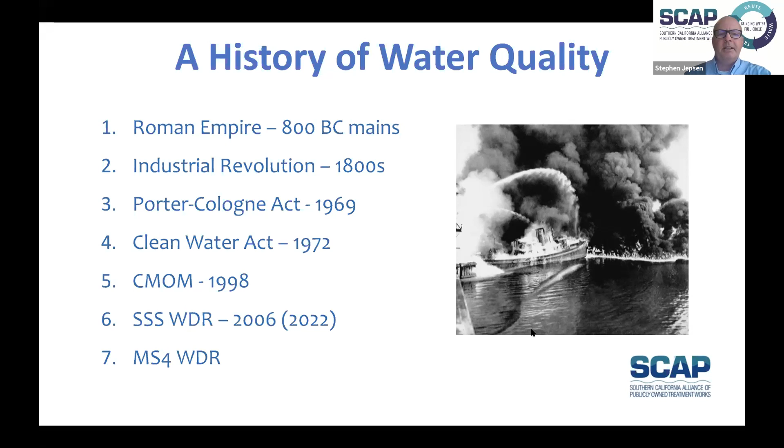Then there's also the stormwater MS4 WDR, focused on cleaning up stormwater. Despite all this progress, we still have water quality issues in our watersheds, so we're not done yet. The benefits of stormwater diversions are that they can help with the challenges we have with water quality in the watershed. Next slide, please.

So the original purpose of POTWs is to treat pee and poo, really designed to transport and treat pee and poo, not metals or pesticides or industrial chemicals. The POTWs treat, disinfect, and discharge the treated water to the ocean or to streams. In some cases, stream discharge is required to maintain environmental flows through the NPDES permit system.

When there's a demand and it makes economic sense for public ratepayers, POTWs do additional treatment to make recycled water for irrigation, agriculture, and manufacturing, and soon we'll have several large-scale potable projects coming online. Next slide, please.

In the process of cleaning human wastewater, we make recycled water, biosolids that are usually used for soil amendments, biogas, mostly methane, which is used to generate on-site heat to improve the treatment process, to generate on-site energy to power the POTW, and used as a low-carbon vehicle fuel, 90% less NOx than diesel. And in a few cases, the biogas is scrubbed and injected into the energy provider's natural gas pipe system.

So what about adding stormwater treatment to the POTW portfolio? Next slide, please.

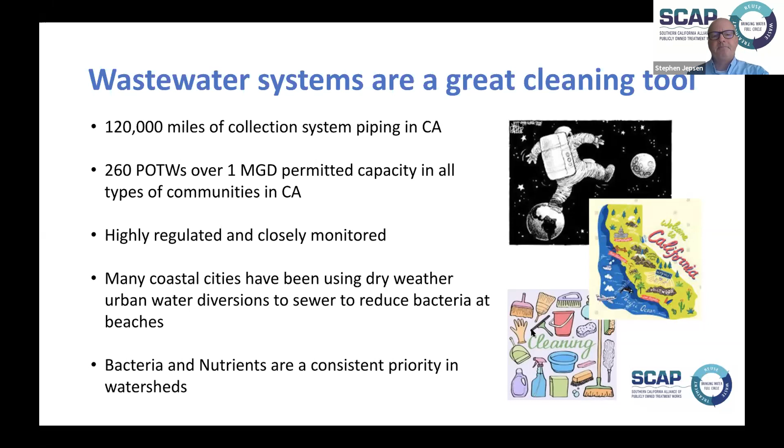So shifting gears for a second, how many workers do we think are at a typical treatment plant? Of course the number varies with the size of the plant, but what do you think the average is? Take a look and put an answer in your head.

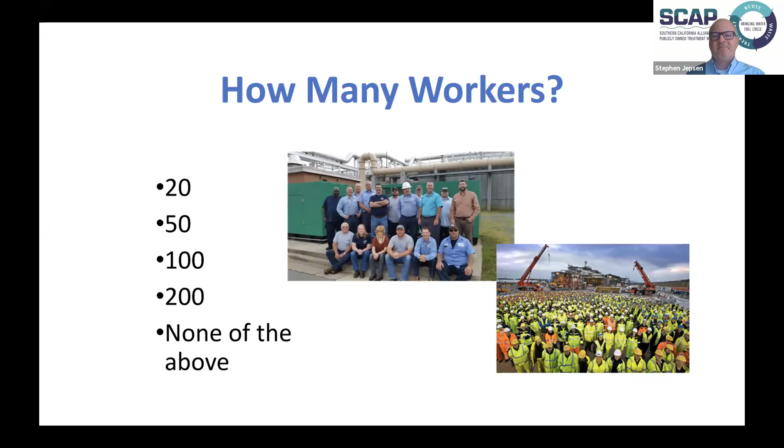If you picked none of the above, you were right. There are billions of tiny microorganisms doing the work of cleaning the water. These workers need a regular food source to thrive. Changing the food source or food ratio, as happens when large amounts of rainwater enter the system, can be a problem. Salts and pesticides, among other constituents, can also be a problem.

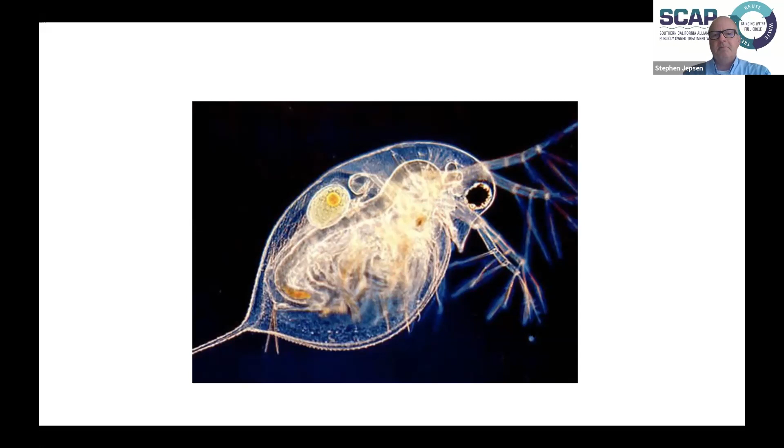So when significant changes in flow or new constituents enter the plant, the workers can die and the plant will be upset. Permit conditions will not be met. Sewer treatment plants have strict discharge requirements that rely on the plant performing at optimum levels. This is why stormwater diversions need to be planned, designed, and managed carefully, as our LACSD team will discuss.

Protecting the treatment plant is one barrier to stormwater diversion, but this can be overcome with source control, pre-treatment, testing, and good design. A previous barrier to stormwater diversions were legal restrictions. Irvine Ranch Water District, Orange County Sanitation District, and LA County Sanitation Districts passed their own specific legislation to implement diversion projects, but this is a heavy lift for smaller agencies.

As Mark mentioned earlier, on September 23rd the governor signed SB 273. This CASA Coastkeeper bill, also supported by CASQA, provides authority for all types of wastewater agencies to accept, treat, and discharge stormwater where it is viable and economically feasible.

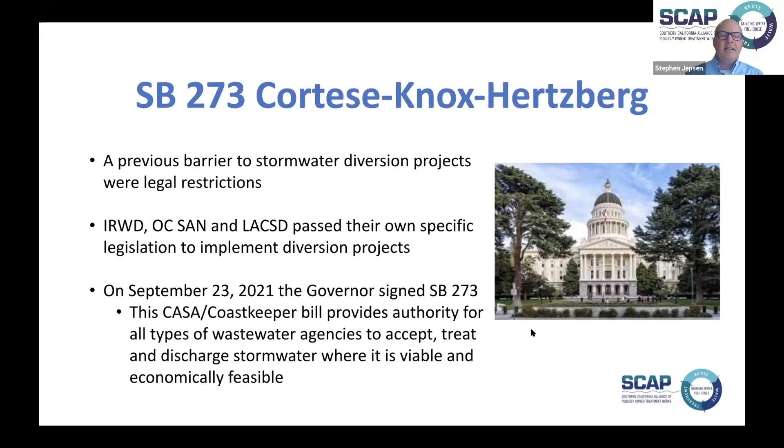So how to get started? Well, first you need to know your audience. There's two differences. Typically, a city or county that has stormwater quality responsibilities is different from a special district or a JPA that does not. Special district type agencies are going to be focused on their wastewater responsibilities. A local satellite or collection system may be part of a regional treatment plant who manages the pretreatment source control program, so there could be two agencies to deal with for a diversion: collection and treatment.

For starters, we should look at the agency's website. Does the wastewater agency have stormwater diversion guidelines or policies? Where is the POTW located in relation to the proposed diversion? What types of effluent does the POTW produce? Are there local limits? What type of constituents will or could the stormwater contain? Will the POTW be able to handle these constituents?

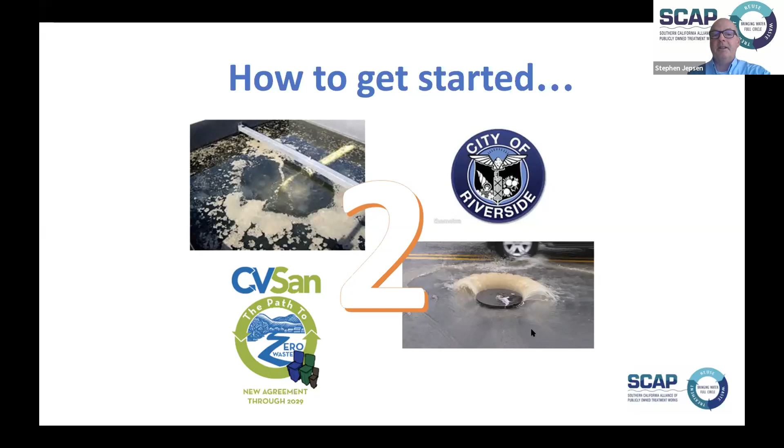Two things that, of course, must not happen: a plant upset or a sewer overflow. Either of these events can affect public health and the environment and bring hefty fines.

So what's next? Many agencies have successfully implemented dry weather diversions for bacteria management in coastal areas. Now agencies are exploring more upstream diversions and controlled wet weather diversions. As part of a recent Southern California Water Coalition webinar, Susan Moisio with Jacobs Engineering talked about smart systems, allowing collection system operators to monitor and remotely regulate diversions real time as system capacity allows.

Richard Loeffler with Xylem has presented to us on how combined systems in the Midwest and East Coast are using artificial intelligence with models and real-time sensors to minimize combined system discharges during storm events, saving ratepayers money with an immediate return on investment. I think next steps will be linking land use types, constituents of concern from those land use types, and sensitivity of receiving water, such as special habitat, recreational uses, and drinking water supply, to prioritize diversion projects.

We'll see hybrid approaches where stormwater capture, diversion, and recycling projects may incorporate dry weather and first flush to the wastewater system, cleaner flows to habitat, and excess clean flow to drinking water supply. If the capture diversion systems can be scaled up and combined to provide flood attenuation, we've hit the jackpot.

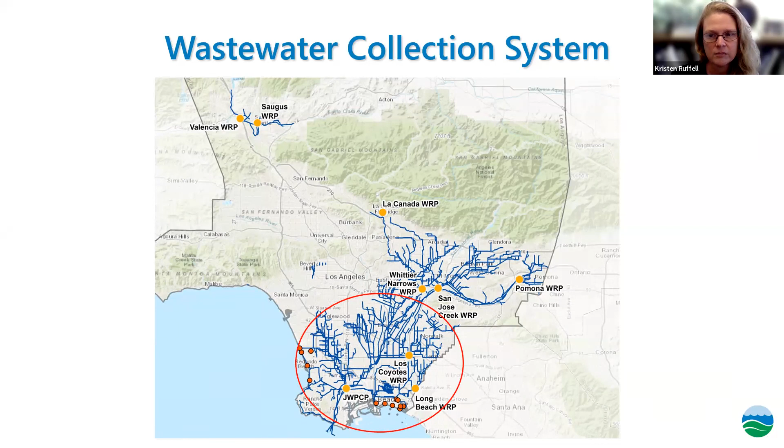The sanitation districts have been part of the solution for water quality issues at storm drain outfalls for a number of years. The red dots at the bottom of this figure show early dry weather diversion projects to our sewer system. They were concentrated along the coast at storm drains that discharged to the beach to protect swimmer health, and they have been a cost-effective solution to beach water quality issues in dry weather. They have provided our agency with some time to become comfortable with diversions to our sewer system.

Although we had accepted coastal low flow diversions as industrial waste, we actually didn't have the statutory authority to help with stormwater, as Steve mentioned, and that's where SB 485 came in. SB 485 became effective in 2016, and once our powers were activated by the Local Agency Formation Commission, or LAFCO, we were able to begin helping local jurisdictions with their stormwater challenges.

Uniquely, SB 485 requires a consultation with the local water master, the flood control district, and the water replenishment district. We found that it makes the most sense for the project proponent to lead this consultation with the district's participation, and it's the first thing that has to happen with any new project coming to the district. Although it's not required by SB 273, it may well be best practice to avoid water rights surprises later in the process.

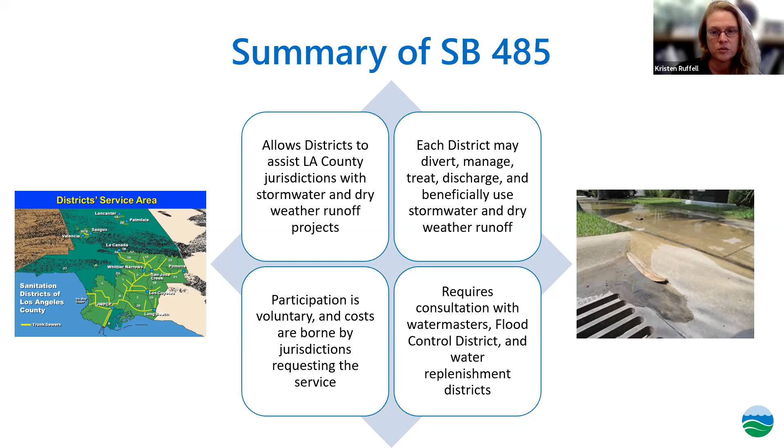The thought of a stormwater diversion into the sewer strikes fear into the hearts of many sewer operators. In fact, uncontrolled diversion during a storm would certainly lead to sewer overflows. It's helpful to remember that permitted diversions are controlled, and to look at types of diversions on a continuum from lower risk to higher risk.

At the lowest level, dry weather diversions are typically very low flow and occur only during dry weather. In general, we found that those are safe over time. At the highest risk, permitted diversion would be real-time diversion distant from a treatment plant. While we have not accepted diversions of this type, we are looking at what it would take to develop the risk-based framework and controls necessary. More on that in a bit.

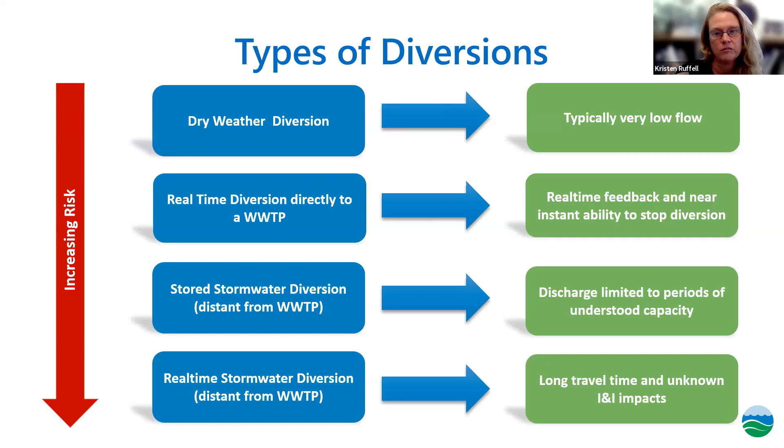In between, we have diversions that we have just recently accepted, and I have some examples for you later in the presentation. So taking a step back, it's helpful to understand what sort of data we currently have available to make these decisions.

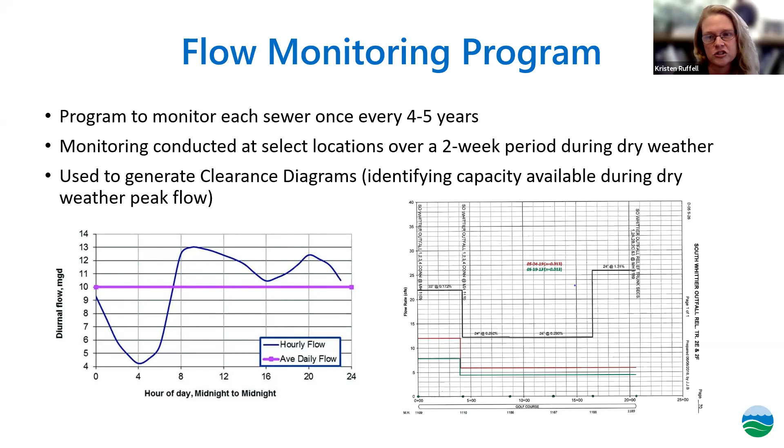As I mentioned, we have a large system, 1,400 miles of sewer, and we clearly can't monitor everywhere all of the time. Our flow monitoring program consists of monitoring key locations in each sewer on a 4 to 5 year cycle. The monitoring is typically conducted during a 2-week dry weather window. Our talented staff in the sewage system management section use the data and their best professional judgment to produce diagrams that show the clearance or available capacity in our sewers during peak dry weather flow at that specific location.

For diversions that operate only during dry weather, we have good data available to evaluate if we can accept them. In many, but not all cases, we can accept a low flow diversion. If we don't have capacity during peak flow periods, we evaluate travel times to the critical sewer, and we can evaluate off-peak capacity.

During this work, we are conscious of other diversion projects to the same tributary. Additionally, for all but the low flow diversions, we require variable speed pumps to better manage diversion flow rates and protect the sewer. Sewers operate better when they have steady inputs. Pumps designed to manage wet weather flow are significantly oversized for dry weather and can stress our system if used on a fill and draw cycle during dry weather.

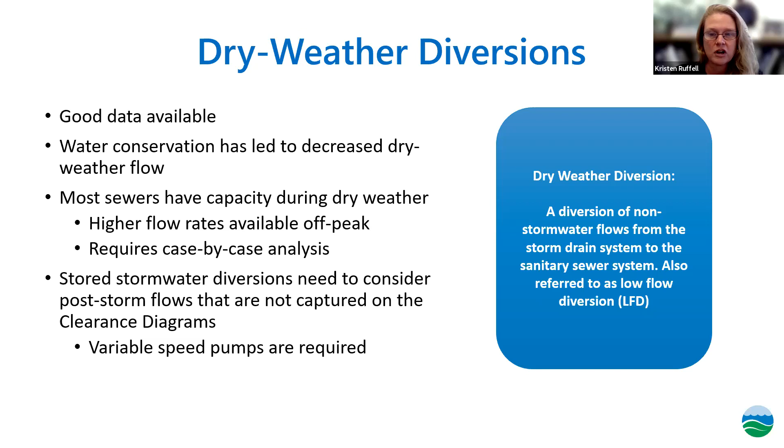Many of you probably don't think that a separate sewer system like we have here in Southern California has issues during rainstorms, but sewer operators will tell you that that's what keeps them up at night. Whether it's from illegal connections, flooded streets, or another cause, sewer systems experience inflow and infiltration during wet weather, and we don't have the ability to stop the flow once it's in our system.

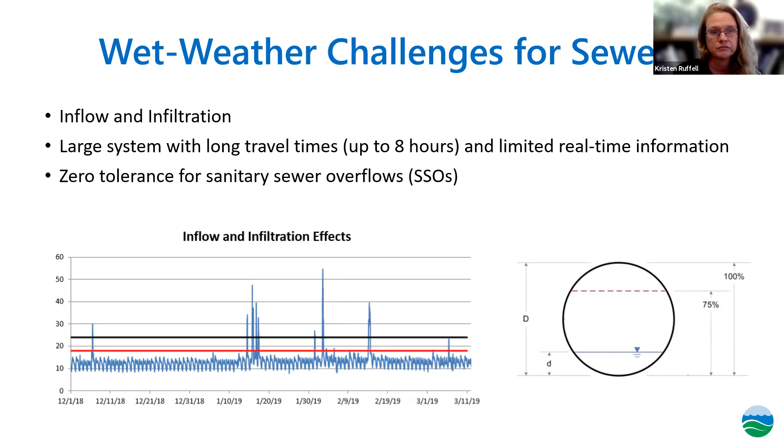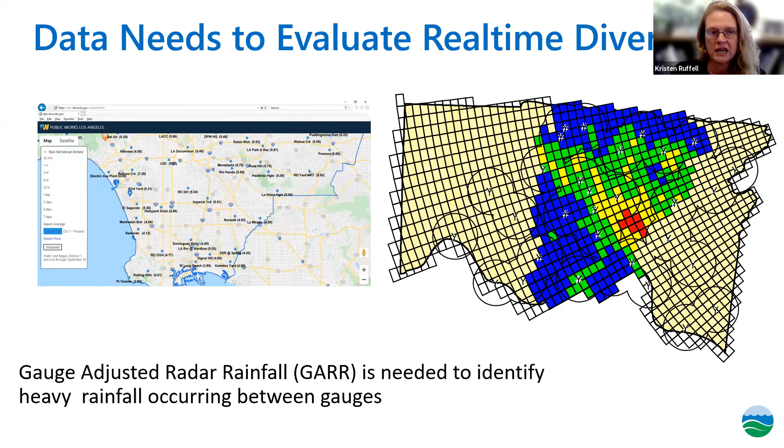The figure on the right is an example, clearly not Los Angeles County, but an example of what gauge-adjusted radar rainfall data looks like. The circles with the Ys in the middle are the gauges in that area. The gauge-adjusted radar rainfall data takes the radar rainfall data, correlates it with what's hitting the ground at the known gauges, and provides a grid 1 kilometer by 1 kilometer that can be used to identify intense rainfall that occurs between the gauges, and also would provide specific geolocated data that can be used for control in the future.

So the process to move towards a real-time diversion: phase 1 is to get the data, both rainfall and real-time sewer flow, and start to understand how they impact each other, develop rules for what represents safe conditions, and then develop predictive logic to identify conditions that may lead to problems in the next 8 hours.

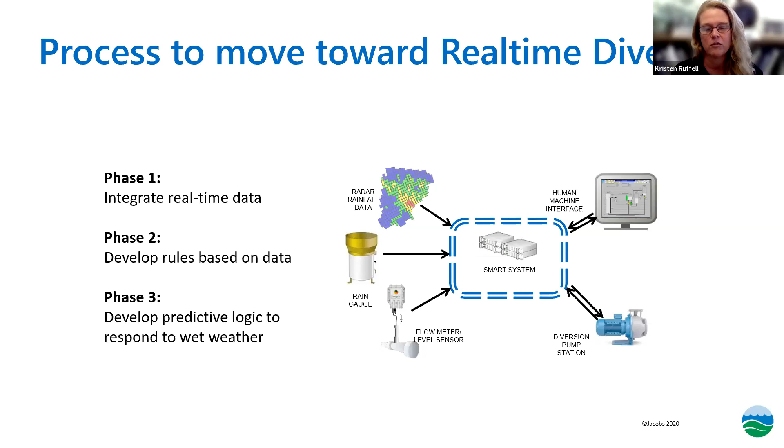Depending on where you are, that's the travel time in the sewer. So the bottom line for wet weather is although projects that need conveyance in the sewer system can store stormwater and divert it during dry weather, this is a project that we can evaluate and implement today.

Real-time diversion to treatment plants are possible. Modeling would be required to evaluate capacity, and it needs to be understood that at least in our system, our upstream plants relieve capacity from downstream sewers, and they have to prioritize sewage before stormwater, but there is some capacity there. We currently can't accept real-time diversions in the sewer system today, but we're working with the County of Los Angeles to consider this in the future. More on that in a bit.

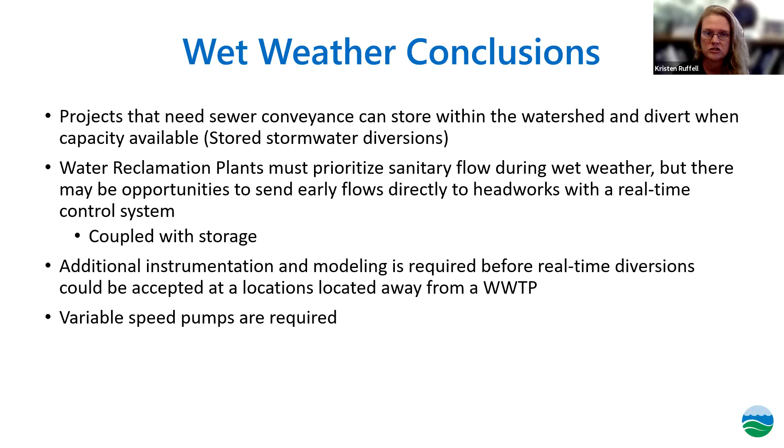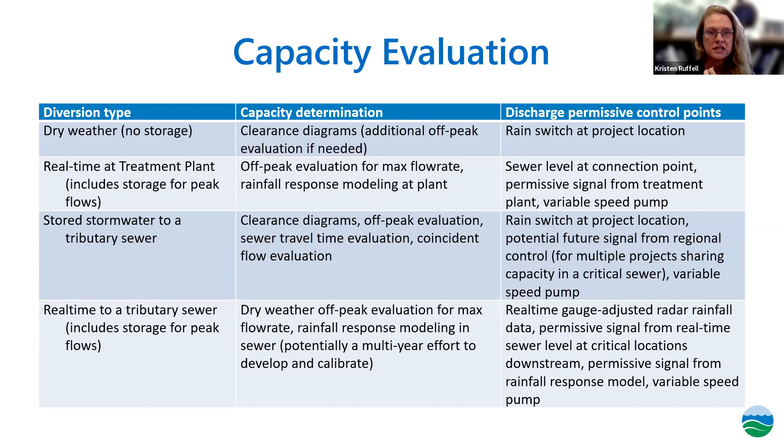If real-time evaluations, the capacity determinations involve modeling, and the control system involves monitoring the level in the sewer and a permissive signal from the sanitation districts. Yet all projects involve a control system that allow the sanitation districts to shut down the pumps in case of an emergency.

So I'm going to go through a few examples. I could probably give a presentation of this same length on either of them. These will be truncated. Those of you who have more questions can follow up with me in the future, but I'll go through examples of some of these various types of projects that are either currently in design or construction or are being contemplated.

Early feasibility evaluations for a sewer diversion at this location showed that while it was technically feasible, the fee to connect to the sewer was cost prohibitive because of the high flow rates. It was over $3 million.

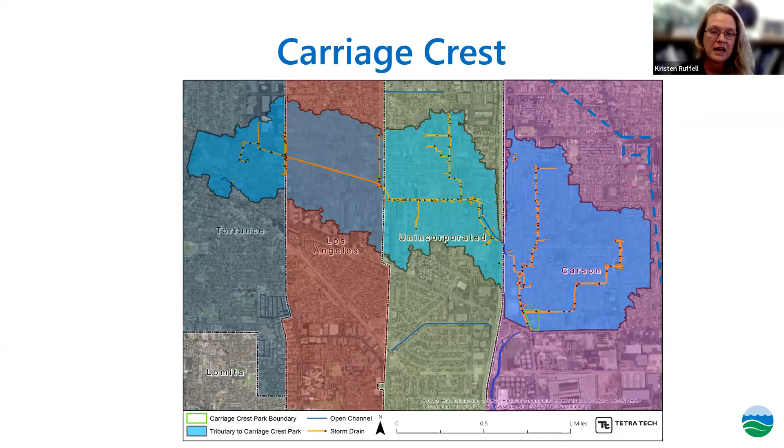The sanitation districts considered the fact that we have unused capacity in our system due to water conservation, and that the ratepayers, our ratepayers in our sewer system and the ratepayers in the stormwater system are the same people. And so we were able to relieve our connection fee for local governmental diversions using unused capacity. This connection fee relief, we find most consultants don't know about this when they are consulting with other municipal clients, and we would encourage them to include connection fee relief as a factor when they are evaluating projects for local governmental agencies.

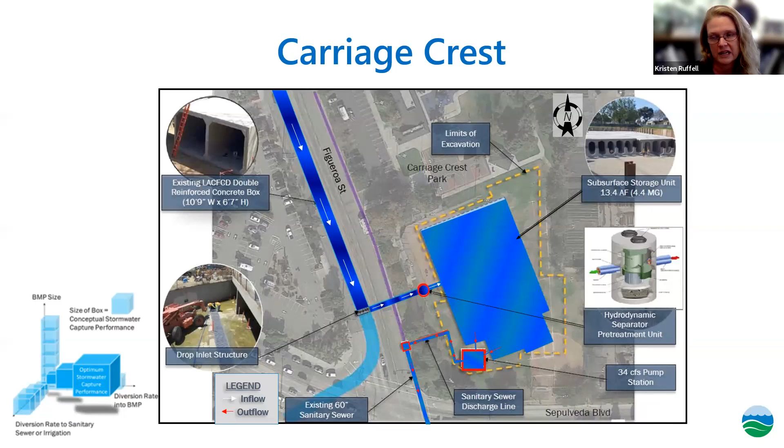So there were two projects on my example list for stored stormwater projects. I won't say much about them. They are in development and the sanitation districts are not leading them. They're County of Los Angeles projects, but there's one at Adventure Park near the city of Whittier, and there's one at Alondra Park near Lawndale. And both of these projects use a very large cistern.

Although these could be stored stormwater projects, the county has filters where they will be filtering a significant amount of the rainwater and sending it back to the storm drain. So these projects actually, although they're storing stormwater, for all intents and purposes, they're operating as dry weather diversions with single speed pumps. There is more capacity in these sewers, and if the county ever wishes to operate these as stored stormwater diversions, we would be able to look at upgrades for these.

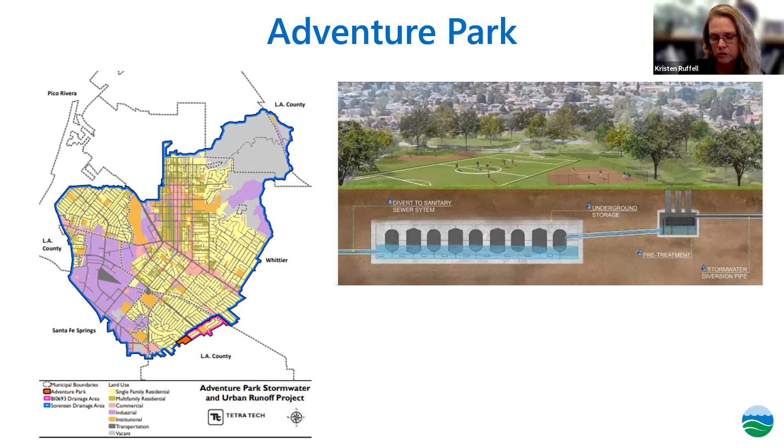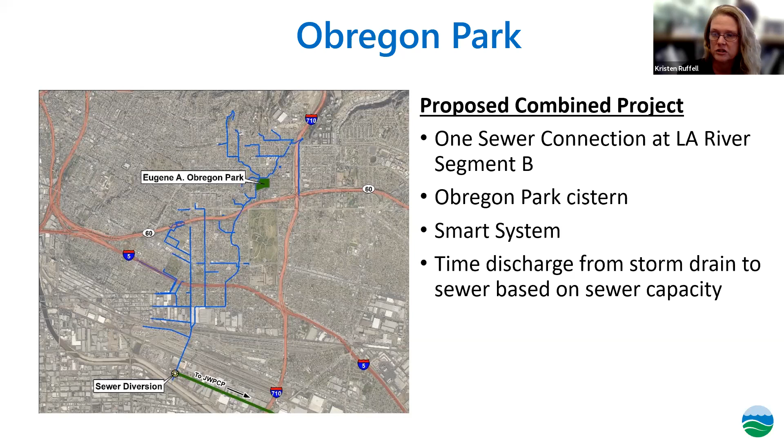So we're working with them. They are looking at this portion of how to size an Obregon Park system and put in a smart system, then time the discharge from Obregon Park back to the storm drain system to go downstream to the diversion. Then the sanitation district's portion of this is the sewer diversion from Obregon Park, and our very long system in between there and where the water would eventually be treated at the Joint Water Pollution Control Plant.

We know that this sewer has excess capacity during dry weather and no capacity during significant storms. We currently have a SCADA tied control system, or sewer level system, at this location, which is a key location in our system for capacity. We also have the ability where this sewer runs by a piece of property that the sanitation districts operate at the South Gate Transfer Station, as another interim place for flow monitoring.

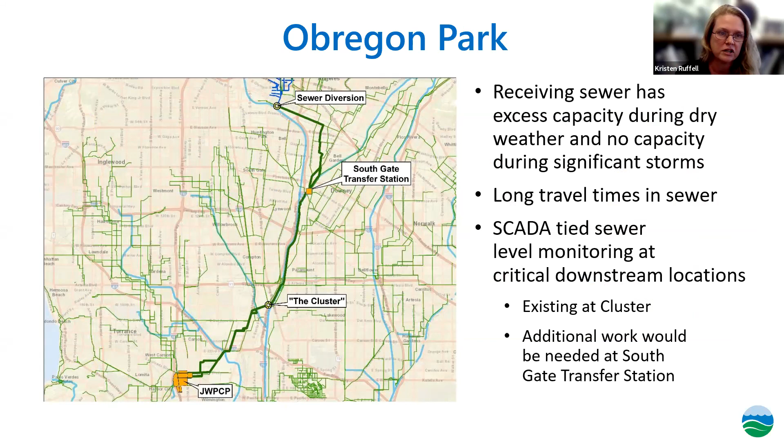We're starting to develop the elements of this project and looking at integrating real-time rainfall data to see what we can do there. The next project I wanted to mention is just starting to be discussed.

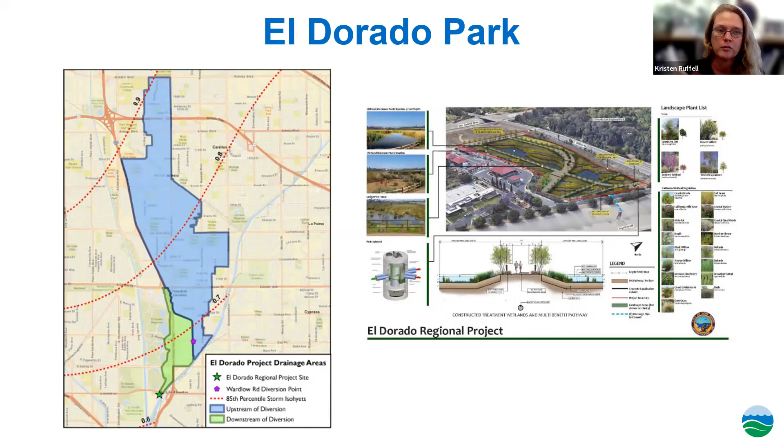The City of Long Beach is working on a wetland project at El Dorado Park. This project is also right across the street from a treatment plant, the Sanitation District's Long Beach WRP. This would be the first project looking at integrating a sewer diversion into a green infrastructure project, to make the project do more both for the green infrastructure and for the water supply.

So final thoughts are that all the projects I've presented here today, and anticipated future projects, will be evaluated on a case-by-case basis. There isn't a one-size-fits-all solution. Partnering early in the project development process usually can identify solutions that neither entity could have identified working alone.

So the district's process for building this is sort of a preview for the presentations to come. It starts with setting up a stormwater services agreement so that the sanitation districts can work on the project consistent with our SB 485 authority. The first step is capacity analysis and consultations with the water masters and flood control.

There is a treatability review by our reuse and compliance section. The next speaker, Erika, will discuss that. After that, an industrial waste permit is submitted, and the industrial waste section develops the permit and does those reviews. There's also a review by our sewer design section to look at the specifics of the connection, to make sure our sewer is protected.

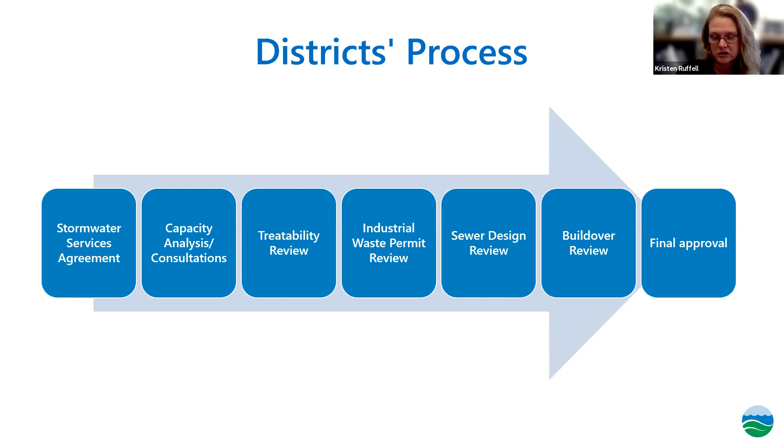And then if the project has any portion, whether or not it connects to the sewer—actually any project that would be in the right-of-way of our sewer—we do a build-over review to make sure that project won't negatively impact our sewer. Then when those steps are done, you can move towards final approval.

And so the next person I will introduce is Erika Bensch. She's the division engineer for our reuse and compliance section, and she'll be able to talk to you about the water quality analysis at our treatment plants and water rights considerations.

Sorry. Thank you, Kristen. Good morning.

Being in the reuse and compliance section of our agency, we are responsible for ensuring that our treatment plants are operating, discharging, and reusing the water according to local, state, and federal rules and regulations, and according to the permit issued by the local regional water quality control board. We also compile monitoring and compliance reports due to the various regulating agencies. We also manage our water recycling program here at the districts, which entails administering the recycled water contracts, inspecting reuse sites, tracking flow, and other duties.

Today, I will discuss the recycled water related issues to consider if you're diverting stormwater into our sewer and treatment system.

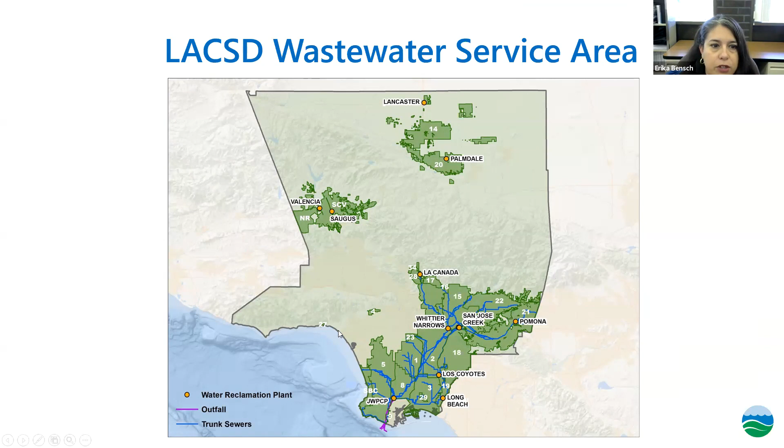I'll also note that our Joint Water Pollution Control Plant, which we call JW for short, discharges to the ocean right now, but we are contemplating ways to recycle that water as well.

When the applicable treatment plant has been identified, we have to consider whether there is enough flow capacity and treatment capacity at the plant to take in the new flow. Maybe there's not enough capacity at a plant like Whittier Narrows at the time, but in that case, maybe the flow bypasses and goes down to our JW plant, and we have to consider whether there's capacity there.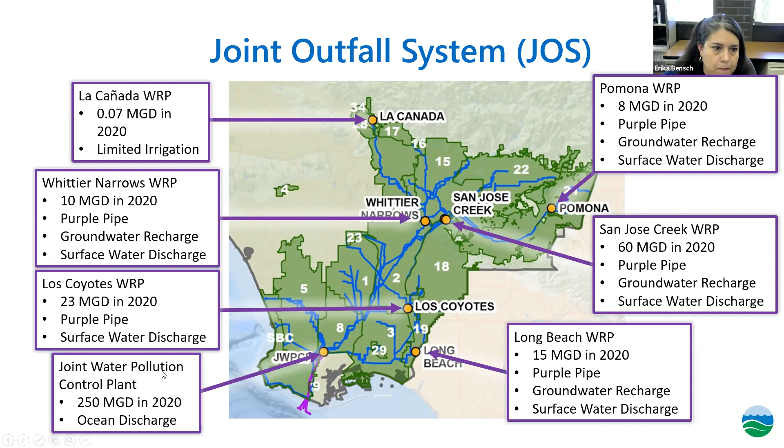So one way to help identify which plant the proposed project would be flowing towards is to visit our website, lacsd.org, or you can go directly to this web address listed right here. We have a map tool that will help delineate the sewer shed, which is kind of like a watershed, but involving sewers, for each plant. This will help you identify where your project is located and which plant the flow would be traveling towards.

Here we have our San Jose Creek Water Reclamation Plant as an example, and its sewer shed. And, of course, our staff can help verify that the correct treatment plant is identified for your project.

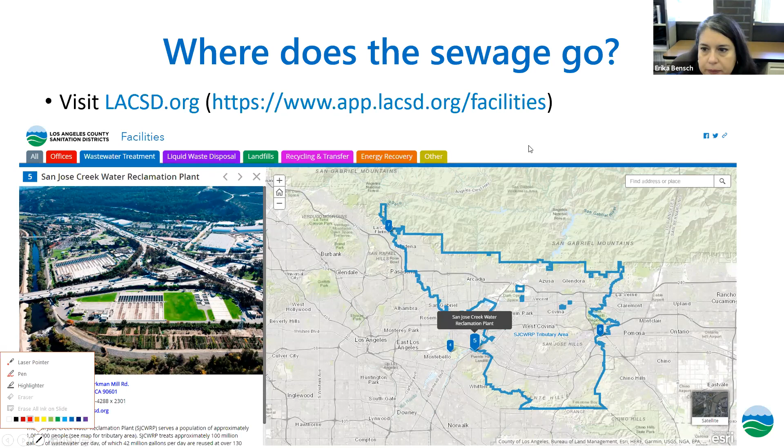Another process to consider is that samples would need to be collected of the proposed water diversion and be analyzed to determine water quality, so that we, the sanitation districts, can examine whether the water has the potential to negatively impact our sewers or our treatment plant processes, which rely on the microbes, as Steve mentioned, and we definitely don't want them to go on a hunger strike or die.

And then also we have to be concerned with our discharge and the uses of the recycled water that is produced. We want to ensure our treated water will not cause harm to human health or the environment. The results of the sampling analysis will help us in that determination.

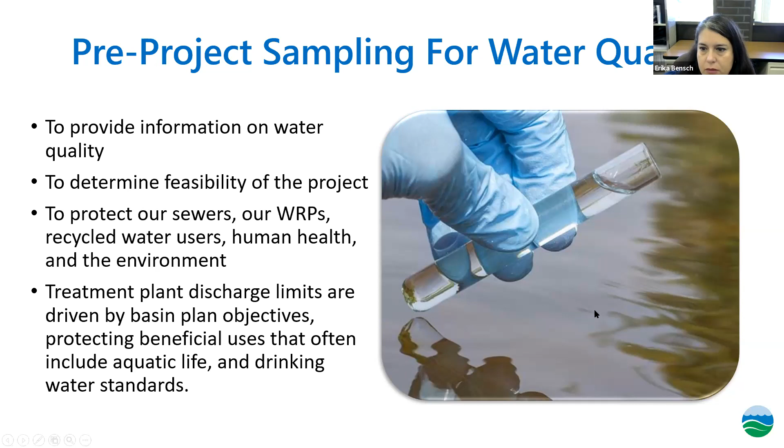When you provide the results of these analyses, we will run them through calculations to determine whether there will be any impacts to, or what would be the projected influent and effluent water quality. Many of these constituents are monitored because we're driven by requirements to meet aquatic life criteria if we're discharging to the local surface water body, or drinking water standards if the recycled water is provided for a potable reuse project.

For example, we would like to know the dissolved sulfides content to evaluate potential impacts to our sewers and to our other facilities. We'd also like to know our chemical oxygen demand and suspended solids to understand what the load would be to our treatment processes. And we'd like to know total dissolved solids content to know whether the concentrations are low enough that they would not impact the discharge to the surface water bodies or for reuse purposes.

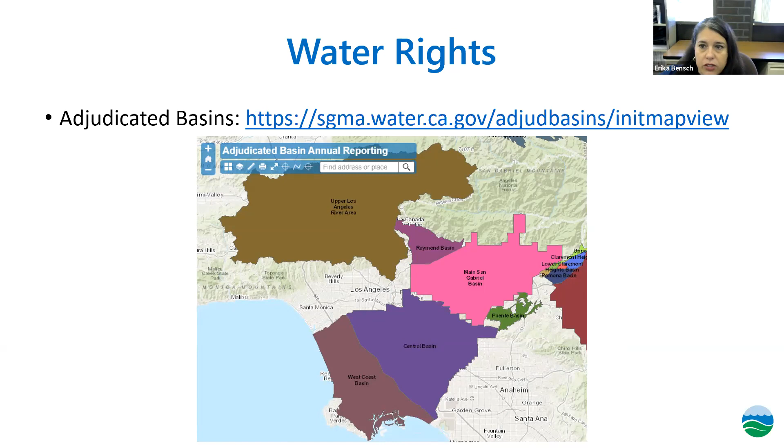Here are some relevant water master websites that can help you better understand the groundwater basins and how they're adjudicated, and also provide some contact information. And of course, we can also provide contact information for you.

I also wanted to mention that a question has come up as to who owns the water rights of the recycled water that is produced. We have to take the responsibility of managing the water coming into our plants, including treatment, discharge, and reuse. This is any water that comes into our collection systems and treatment systems, per California Water Code section 1210, which gives us the rights to the water.

When it comes to managing the water after treatment, we have to evaluate whether the water must be discharged to support downstream habitat needs, in which case we consult with the Department of Fish and Wildlife and the State Water Board per California Water Code section 1211.

Or maybe the water can be beneficially reused for other purposes, whereby we look at our existing recycled water sales contracts with our water partners and reusers, or maybe there are other new opportunities for reuse projects. In any case, we are very excited because stormwater and dry weather diversion projects can contribute to the recycled water supply, which is especially important in this arid region.

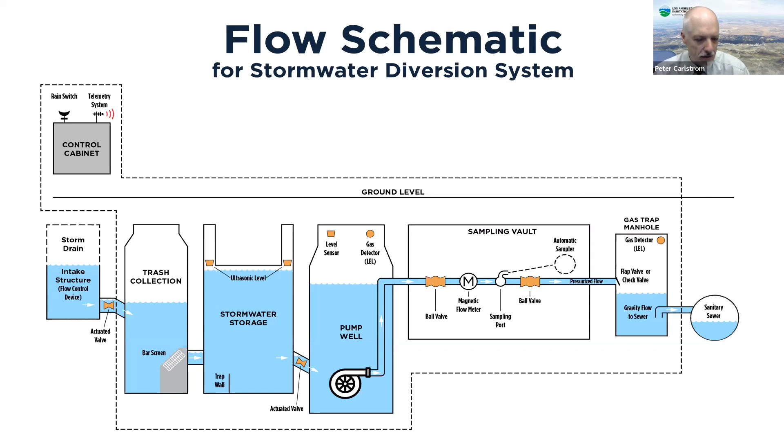Stormwater facilities should also plan to install telemetry that will interface with the district's SCADA system at our Long Beach Main pumping plant. This is to allow continuous monitoring by the sanitation districts and a remote shutdown of the discharge in a sewer emergency, such as an impending overflow in the downstream sewer. The telemetry system will have to pass functional testing before the diversion facility can start discharging.

Specific equipment and telemetry related setup questions may be directed to either of these two contacts listed here on the slide.

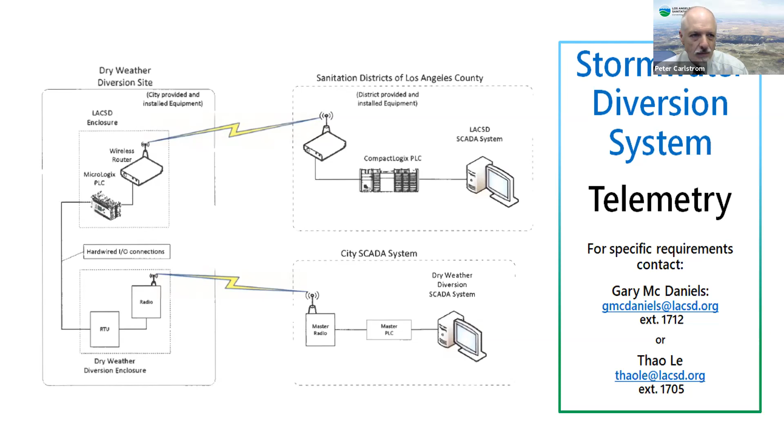Now let's look at the industrial waste permit application process. All stormwater projects connected to the sanitation district sewer system must first obtain an industrial wastewater discharge permit before the start of construction. Discharge permits are issued jointly by the sanitation districts and local agency, which is either the city with jurisdiction at the point of discharge or the Los Angeles County Department of Public Works.

The first step is to submit an application package to the local agency, a list of which and their contact information is available on the district's website at the bottom of the industrial waste permits page. The local agency will review and approve the application if it's complete and meets their local requirements, and most local agencies will also require payment of a processing fee before approving a permit. Once approved, the local agency signs and forwards it directly to the sanitation districts for review.

The sanitation districts then take typically about 30 days to process and approve a permit, with the caveat that the applicant respond promptly to any questions which may come up during the review. In its evaluation, the district reviews the application to ensure the pretreatment and monitoring equipment meet our requirements, verify flow rates and sewer capacity, and establish permit limitations and conditions.

As Kristen mentioned earlier, local governmental diversions are exempt from connection fees, but if the project does not fall into that category, then a connection fee is calculated and must be paid before the permit is issued. I'll cover more on sewer fees shortly, but moving on, the approved permit and plans are then returned to the local agency with a copy sent to the permittee.

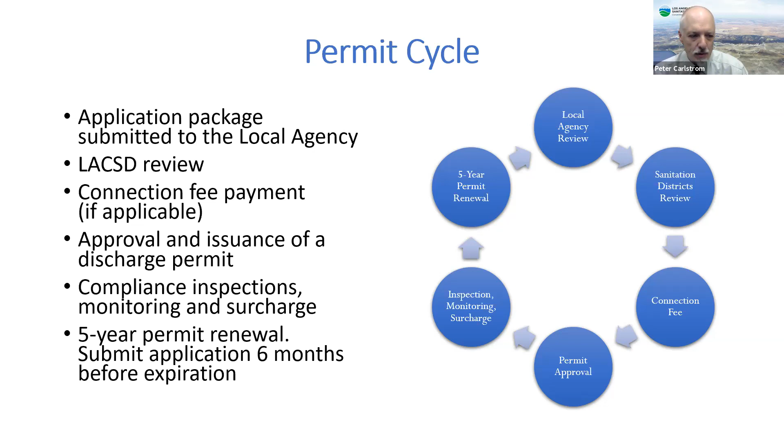The permit application consists of 5 forms, which are available to download from the district's website or by calling the industrial waste section for a hard copy. Keep in mind that the application is designed for a variety of manufacturing and industrial type facilities, so not all the information asked for on the forms is applicable to a stormwater facility. But if you have any questions or need help filling out the application, please contact the industrial waste permit staff.

The application form is the most important, as it lists the legal name of the permittee, the organization type, any corporate information, the location and mailing address, and also provides information on the proposed wastewater, including the estimated flow rates and pollutants. It's the one form signed by the applicant, the local agency, and the sanitation districts, and becomes part of the approved permit.

The applicant questionnaire is relatively straightforward and provides basic information such as the type of permit application, whether it's a new permit, a renewal, or a revision, and the contact person information.

Form B documents the flow rate estimated on the application and how it was determined. For facilities not yet in operation, an addendum to Form B should be submitted with the estimation procedure. Form C is to list the chemical tanks and verify adequate spill containment if there's any. Form D is just a checklist to help the applicant ensure all the forms and supporting information are submitted.

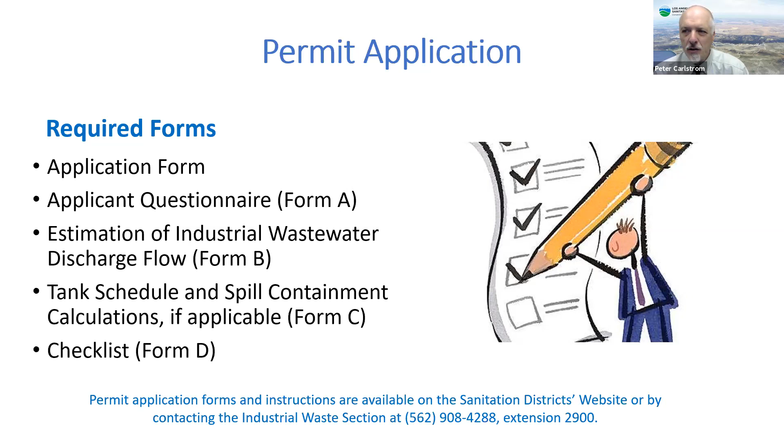The application form should be accompanied by plans and supporting information. The drawings will include a detailed sewerage plan drawn to scale with all sewer lines and associated wastewater facilities, from the intake structure to the public sewer connection, a plot plan of the facility with the adjacent streets and north orientation, equipment plans, and drawings of the wastewater monitoring facilities with the flow meter, sample point, and monitoring equipment locations. Any spill containment structures such as chemical storage areas, and detailed flow meter plans, including the upstream and downstream piping, and of course plans for the rainwater management and combustible gas monitoring systems.

In addition to the drawings, the application should have a description of the diversion project, such as the purpose and scope of the work, operations and procedures, flow estimation method, and also a map of the drainage area with all the tributary NPDES permits identified, catalog cuts of all the equipment with flow meter, gas monitoring, and rainwater management systems, and safety data sheets for any chemicals that are going to be used. Lastly, the wastewater test results from the pre-project sampling mentioned by Erika earlier should be submitted with the permit application.

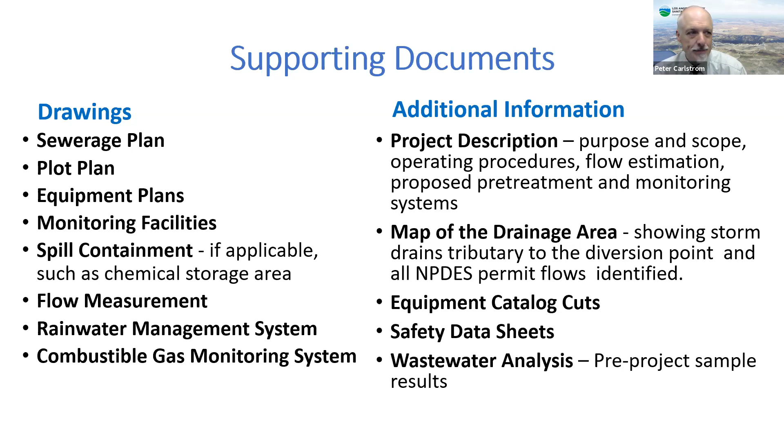Now, a little about the costs associated with the industrial waste permits. The district has two main revenue programs for industrial dischargers. The connection fee is a one-time fee for all new users of the sanitation district sewer system, as well as existing users that increase the quantity or strength of their discharge by more than 25%.

The connection fee funds capital facilities that increase sewer and treatment plant capacity. It bears repeating that local governmental diversions are not charged connection fees, but if a stormwater project is not owned by a local agency, it will be assessed a connection fee based on the average daily flow rate and strength of the wastewater.

The second revenue program, called surcharge, is an annual sewer use fee that reimburses the districts for ongoing wastewater collection, treatment, and disposal costs. All permittees, including stormwater projects that discharge over 1 million gallons per year or have high strength wastewater, file and pay annual surcharge.

Permittees with flows less than 6 million gallons can elect to file either a short or long form surcharge statement. The primary difference is that long form filers have additional sampling requirements for chemical oxygen demand and suspended solids, and potentially peak flow charges.

Facilities that discharge over 6 million gallons a year or have high strength wastewater must file long form. Stormwater diversions typically have lower strength wastewater, so they'll generally pay less filing the long form if there's a choice. It's important to keep the costs in mind during the planning stages to minimize operating costs later.

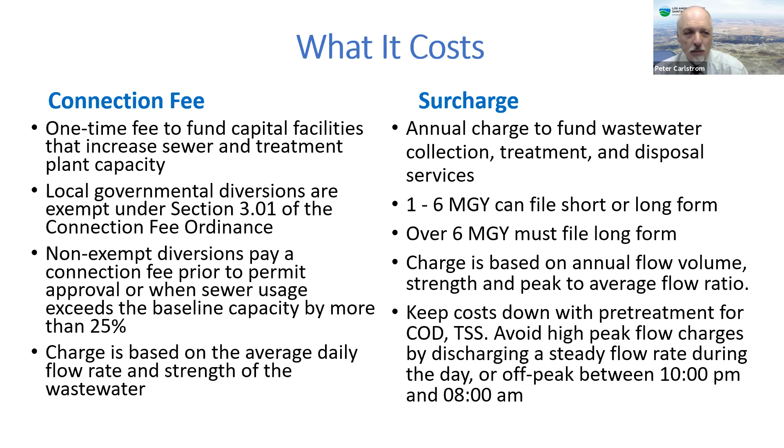The last topic I'll cover briefly is the ongoing sampling after the permit is issued. There are two types: self-monitoring and surcharge sampling. Self-monitoring reports are due semi-annually for substances including pH, COD, suspended solids, dissolved sulfides, and any pollutants of concern determined during the permit evaluation.

These will also be listed on the permit data sheet and on blank self-monitoring report forms, which are mailed to the permittee prior to each reporting period. The sanitation districts will also sample a minimum of once per year, or twice for long-form filers. In addition, long-form filers take additional samples for COD and suspended solids based on the annual flow volume, ranging from quarterly for less than 15 million gallons a year of discharge up to twice per week for over 250 million gallons a year of discharge.

The surcharge sampling schedule is listed on the permit data sheet and helps ensure that the strength and flows are representative of the discharge throughout the year. Lastly, because standard surcharge sampling requirements may not adequately address the seasonal and irregular nature of stormwater discharges, the permittee may be authorized to implement a modified testing schedule to ensure that sampling is representative of both wet and dry weather periods.

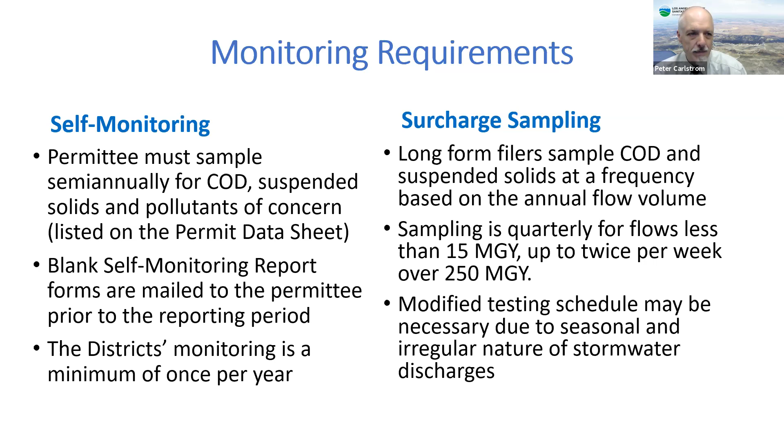And with that, I'll turn it over to Rosann and her presentation on considerations for design and best practices.

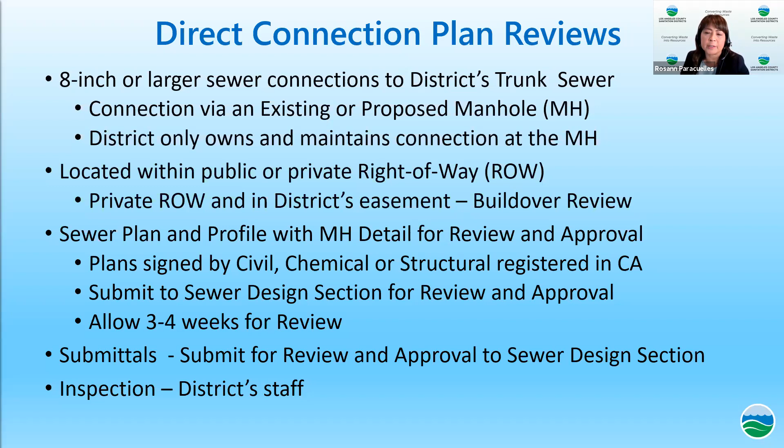These include manhole shoring, manhole submittal, flow-through plug, and any other items listed on the plans. You should allow about 3 to 4 weeks for review of these submittals. Lastly, during construction, the districts will be providing inspection for all work related to the construction of the direct connection.

The following is a list of design considerations to keep in mind when preparing the sewer plans for the direct connection. These are items that we particularly check for during the plan review process.

Prior to connecting to the district's trunk sewer, any force main or pressurized connection should break to gravity. The alignment of the proposed sewer should be such that the connection comes in perpendicular to the district's trunk sewer. The invert elevation of the proposed sewer should be designed such that the water surface elevation matches the water surface elevation of the trunk sewer at the design flow depth.

We do not allow drop connections at the district's trunk sewer. Any drop connections should be located upstream before the connection to the district's trunk sewer. The slope for the portion of the proposed sewer that connects to the district's trunk sewer should be designed to meet a minimum velocity of 2 feet per second to prevent deposition of solids, and no more than 10 feet per second to prevent possible erosion and excessive turbulence.

If construction of a new manhole is required to connect to the trunk line, the size and type of manhole will be determined based on the existing trunk sewer, the proposed sewer diameter, and the depth of cover. Typically, if an existing trunk sewer is 30 inches or less in diameter, a 48-inch type D manhole is sufficient for depth of cover greater than 6 feet. For larger diameter sewers and larger connections, a larger manhole such as our 60-inch diameter manhole E may be necessary. Also, depending on whether the existing sewer is lined or not, a special detail may be required for liner termination at the new manhole wall.

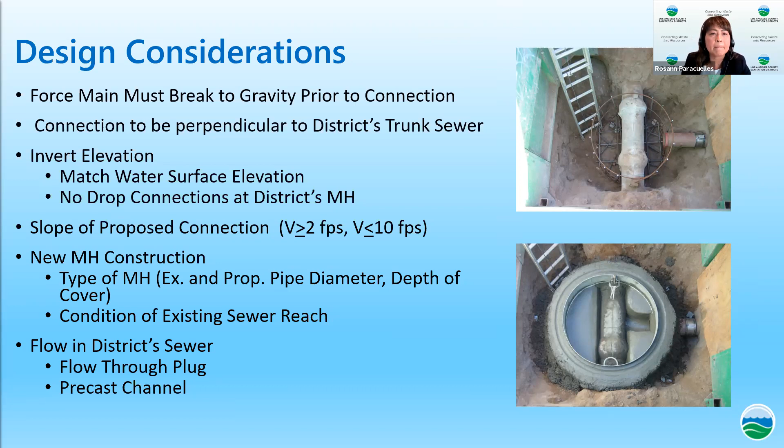Here is an example of a profile showing the force main breaking to gravity at a drop manhole upstream prior to discharging to the district's manhole. We typically require that the pipe material is transitioned to VCP at the district's manhole connection.

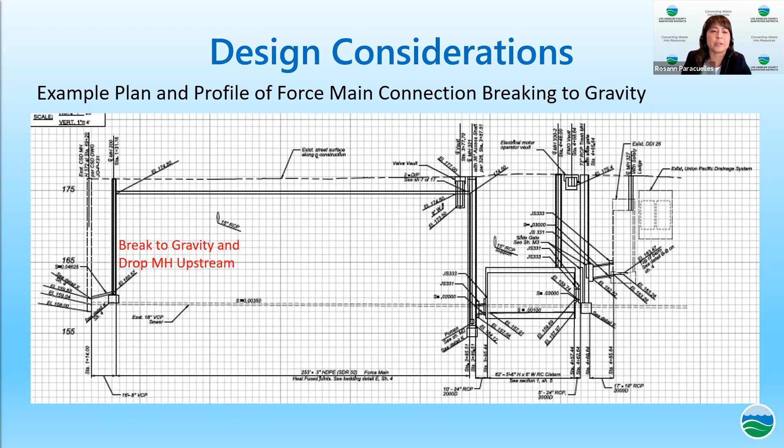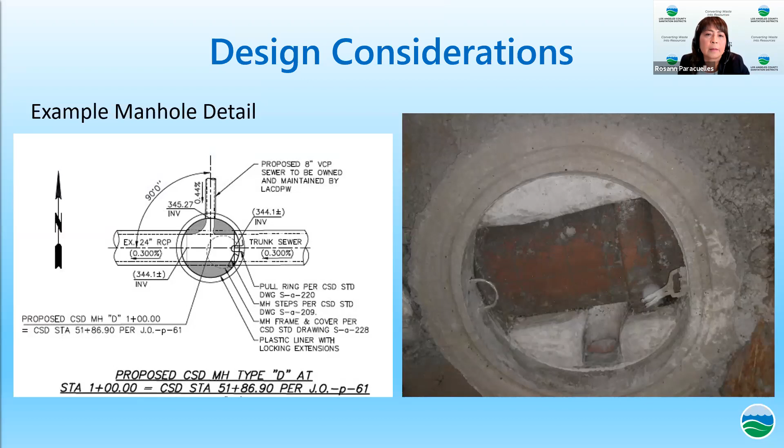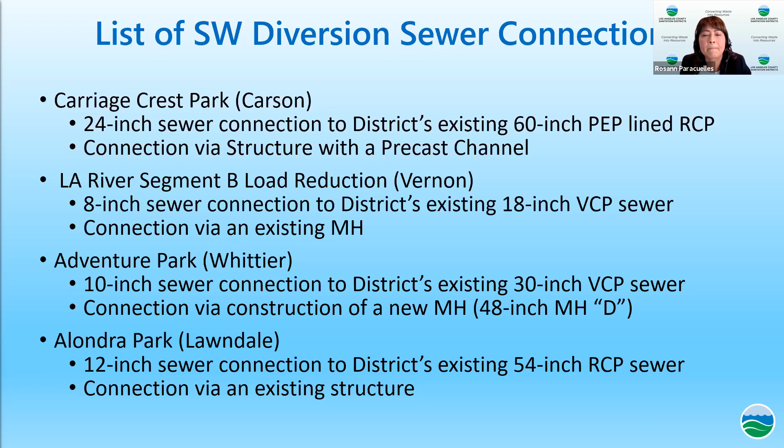In summary, most of the requirements and design considerations I discussed during this presentation are general guidelines, and keep in mind that project-specific details may be necessary for your particular project or situation. So if considering a direct connection to the district's trunk sewer, please consult with the sewer design section during the early phase of the design so that these factors can be discussed in more detail. Next, Danielle Thomas from our property management group will talk to you more about the build-over review process.

Great, thank you very much, Rosann. There we go. Okay, awesome.

So yes, as Rosann mentioned, I'll be talking to you about buildovers and our process for protecting our sewers. Whenever we do a buildover review, it is a hard requirement anytime there is construction within or near our sewer easements. This is a mandatory requirement. There's really no way out of it unless you have a direct sewer connection, in which you would work with our sewer design section, or if you are in the public right of way. Otherwise, this will be a mandatory requirement at no cost to the project team.

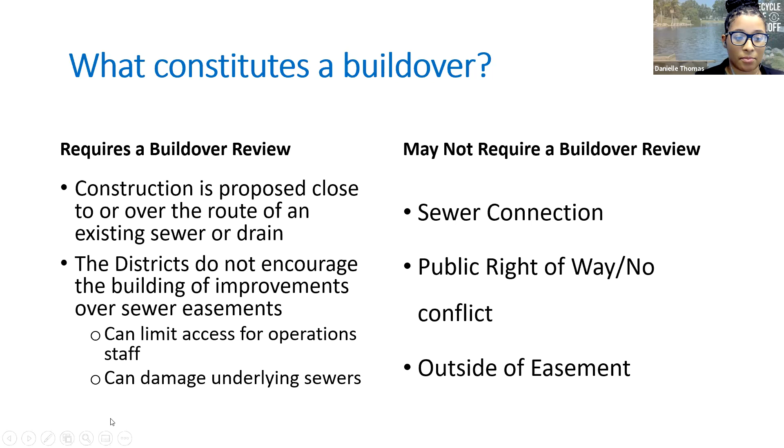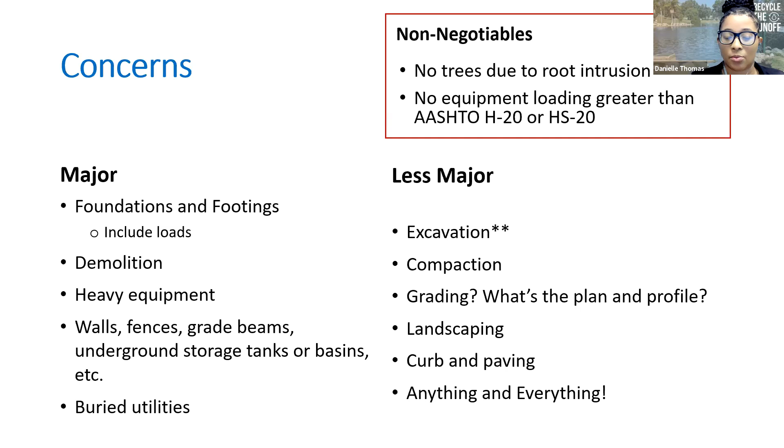Things we typically look for include any large buildings, any large underground stormwater infrastructure, any really deep vertical excavations right outside our easement, anything that can really threaten the integrity or stability of our sewers. Also, things we'll look for immediately: any trees in our easement, which is absolutely not allowed. And we often ask about what equipment you plan to use, because we do not allow any equipment with a loading greater than what is listed on the screen. But overall, we will look for anything and everything, and we do have a rigorous review process.

Once you send this to us with your plans, often myself or another buildover coordinator will give you some preliminary revisions. Anything that we catch right away that will be a problem, we'll send it back. Then after that period, once the construction plans are ready for a full buildover review, we send it to 3 different engineering sections for review.

There, they'll be looking to evaluate any additional loadings, the existing conditions of our sewer, and the potential contingencies that will be created as a result of the proposed construction. We always look to make sure we're going to maintain access and operation of our sewers and manholes during construction, and also once the construction is complete. These are the things we'll be looking for.

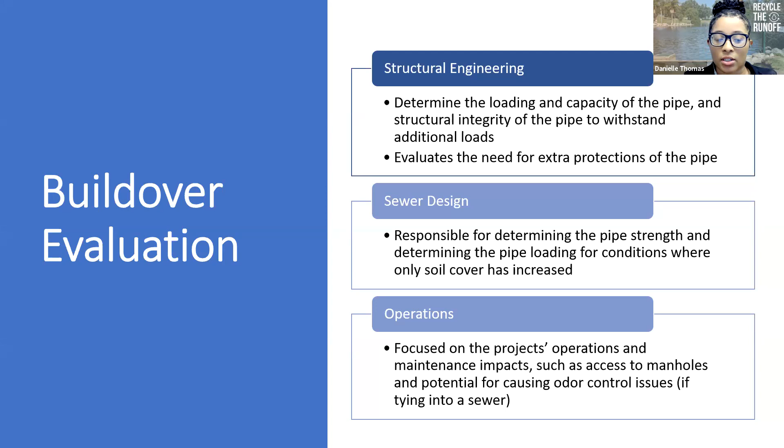This process usually takes about 4 weeks. Once the review is completed, one thing we may often ask as a result is to do a CCTV inspection, but this is on a case-by-case basis. It often depends on the existing conditions of our sewer and the project scope that's being proposed.

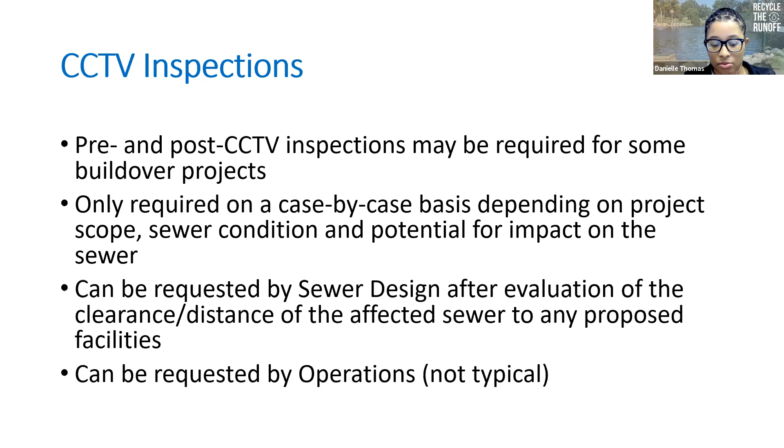Once everything is approved, the construction is approved, the plans are approved, then we will issue our buildover approval letter and a buildover agreement. A recorded buildover agreement will typically be required for any stormwater projects. This agreement is recorded with the county clerk against the property, and we do also require notarized signatures, typically the owner of the property and then our district's chief engineer.

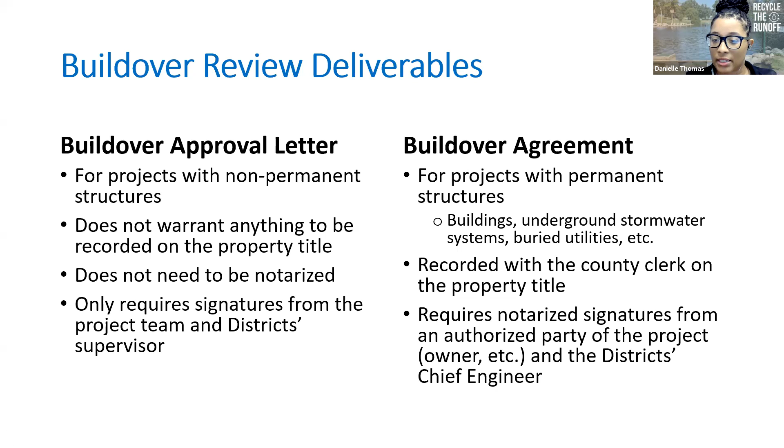But for agencies and cities, often getting the signature can take more time depending on who is authorized to sign it. So keep that in mind when you're budgeting for time.

Once everything is approved and the agreement is finalized, then you can move on to construction within our easement area. Inspectors are required to be there on site anytime construction activities are occurring within the easement area. This is another hard requirement. Our inspectors are very accommodating. The only days they don't go out is on a Sunday.

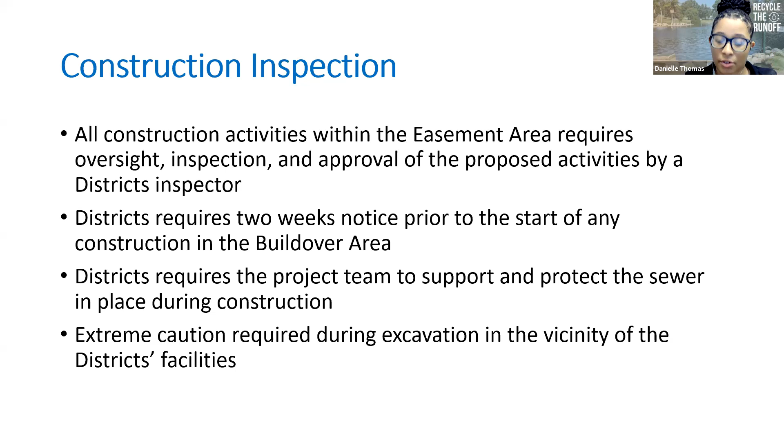We typically ask for 2 weeks notice, but they can be there with as little as 1 week notice. Like I said, we're very accommodating because this is a very hard requirement for every project that will be occurring within our easements.

With everything I've listed, you may be wondering how long this all takes. The minimum time requirement for districts is 2 months. That does not account for the time of the project team to respond to our comments, to revise any plans. All of that takes additional time. So you can budget for maybe around 3 months, maybe longer, depending on the complexity of the project.

A question we often get asked is, can we expedite the process? The answer is no, unfortunately we cannot expedite this process at all. One thing that the proposing team can do is to make sure all of their plans are already meeting our requirements and to respond quickly to any comments or revisions that we require. That is how the process can be sped up.

So to walk through some examples, Alondra Park mentioned earlier, we had an underground stormwater management system in Lawndale, in addition with buried utilities and curb and paving. This resulted in a recorded buildover agreement.

We also required the construction of a new manhole, and specifically we required the drop manhole to be constructed upstream of our connection because we do not allow any drop manholes at our connection. And of course, an inspection was required.

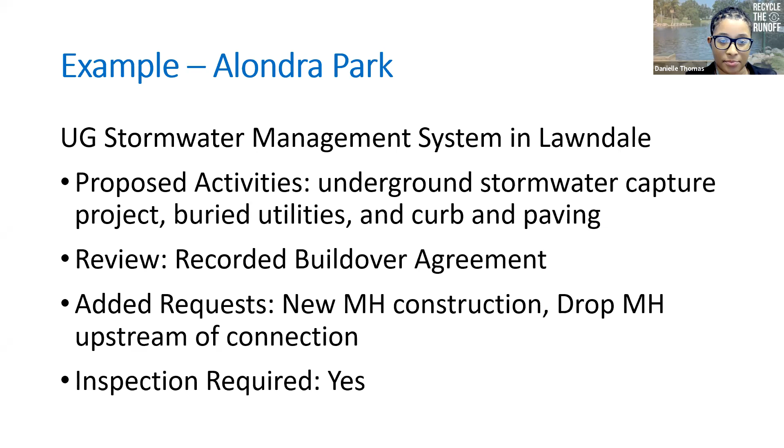Then we have another underground stormwater capture system in Whittier, also mentioned earlier. We also had some grading adjustments with this project, which resulted in a recorded build-over agreement. We also required a CCTV inspection specifically for this project, and had some specific requirements for the manhole construction.

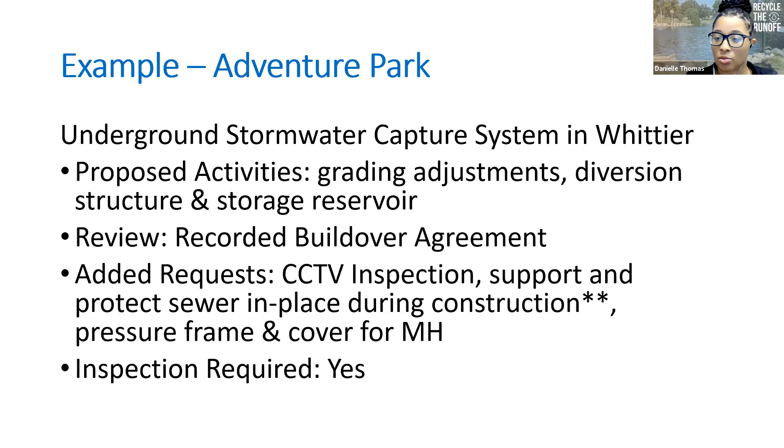This is a unique project because we originally required a concrete encasement of a pretty long stretch of our sewer. Through working with the project team, with them making changes to their construction plans and us doing further evaluations of our sewers, we were able to find a happy medium with the specific requests of support and protection of our sewers in place during construction. So a great example of the district working with the project team to reach a happy solution.

That's because for the second phase of their project, all of the major construction had significant vertical and horizontal clearance from our sewers and were outside of our easement. The only work actually being done within our easement was some minor grading adjustments. As a result, the build-over review process was really simple. It was pretty quick, we had no specific requests, and it was overall a really simple and painless process for them. So that's the goal.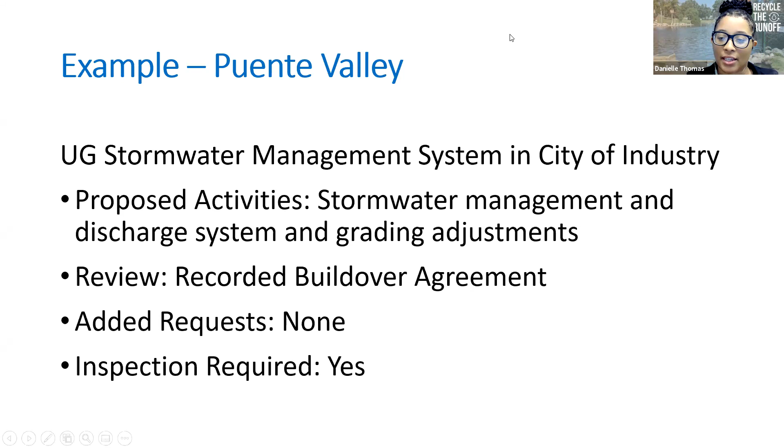That's the gold standard—just take all of the major construction out of our sewer easements, and we typically won't have any issues. But still, of course, an inspection was required because that is a hard requirement for every single build-over project. And with that, I am happy to turn it back over to Kristen, who will give a further wrap up of our discussion here.